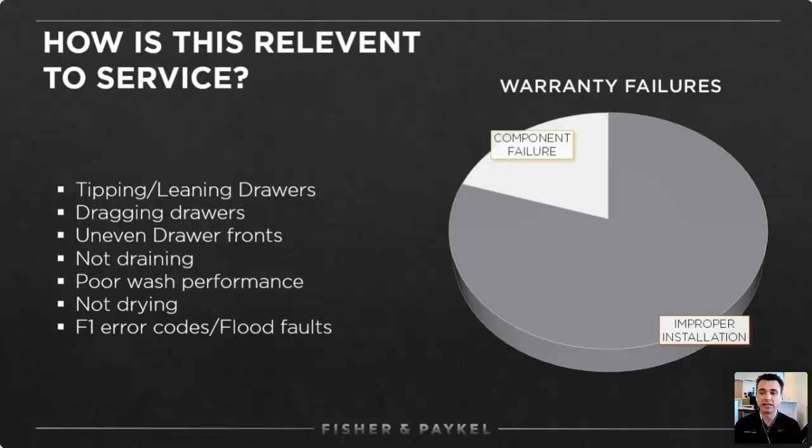There's a variety of symptoms to look for when you suspect improper installation, including drawers that tip or lean out of the enclosure when they're opened, drawers that do not line up with one another, poor wash performance, poor drying, poor draining, flood faults, just to name a few.

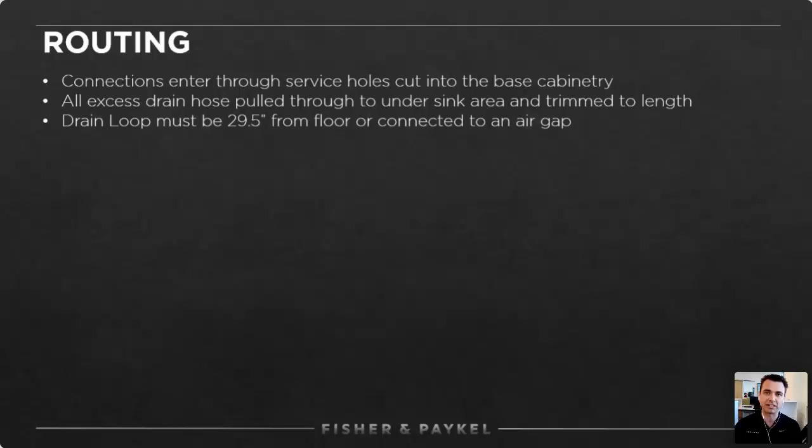The first topic that we want to cover when it comes to the installation and things to watch for when you're called out on a service call for these products is the routing of the drain hoses. This is a very critical part of the installation, and it is almost never done correctly. The hoses are meant to be routed through the service holes that are drilled into the floor of the undersink area, not into the sidewall. Having the lines routed through the cabinet floor ensures the maximum efficiency of the product and also reduces the chances of the drain hoses kinking, leading to other issues down the road.

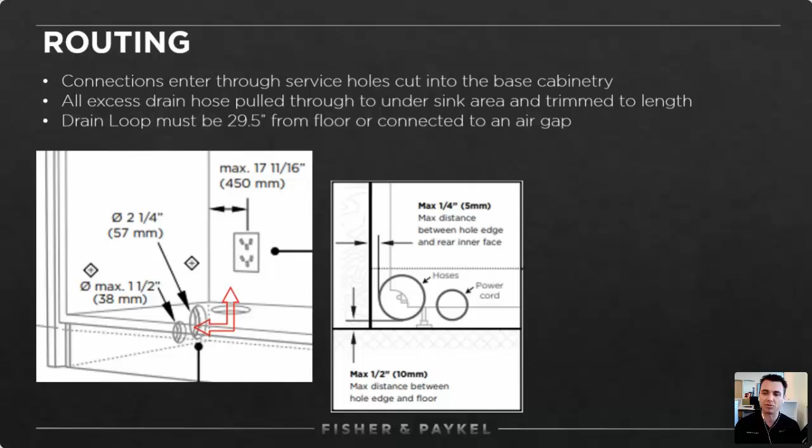All of the excess drain hose should be pulled through to the undersink area and trimmed to length as needed based on the drainage setup of the home. You'll often find most of the excess drain hose bundled up behind or underneath the machine. As we said, all of the excess hose should be pulled through to the undersink area and immediately routed as high as the undersink area allows, or at least 29.5 inches from the floor.

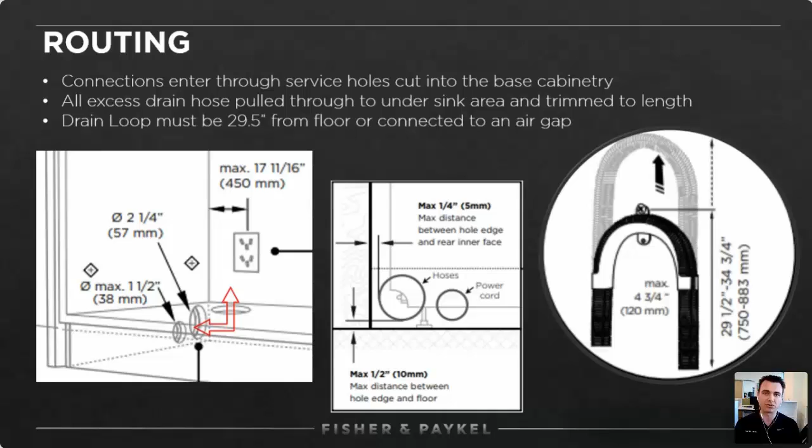If you're in a market that uses an air gap or a similar type of drainage device, then you will not need a drain loop because the air gap or similar device will take the place of that. But if you are not in a market that uses an air gap or devices like that, then you will certainly need to have the drain loop bracket mounted properly and utilized. They do come provided with the product, but oftentimes you'll find that they're mounted too low, they're incorrectly placed, or sometimes they're not even used at all. All these factors can lead to some of the issues mentioned earlier: poor washing, poor drying, poor draining, even flood faults.

There's a few different styles of drain connections that we encounter in the field. The most common that we see basically fall into three categories. If you are in an area that does use air gaps or other devices like that, we do recommend a dual air gap where it has two inlets and one outlet. Obviously, each drawer has its own drain line, so we can separate the drainage, and that will absolutely stop the chance of backwashing from one drawer to another.

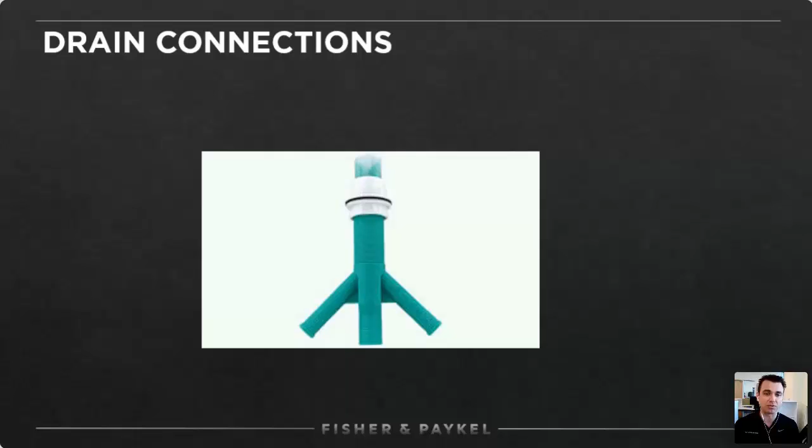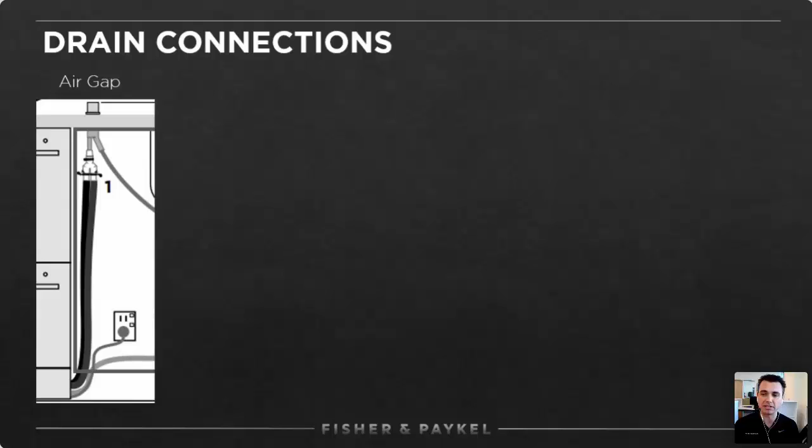But as we can see here, a single air gap works just as well when the drain hoses are routed properly with the provided yoke. The other type of drain that we'll see, much less common nowadays, is the standpipe. And again, we can see that our drain loop bracket is mounted properly.

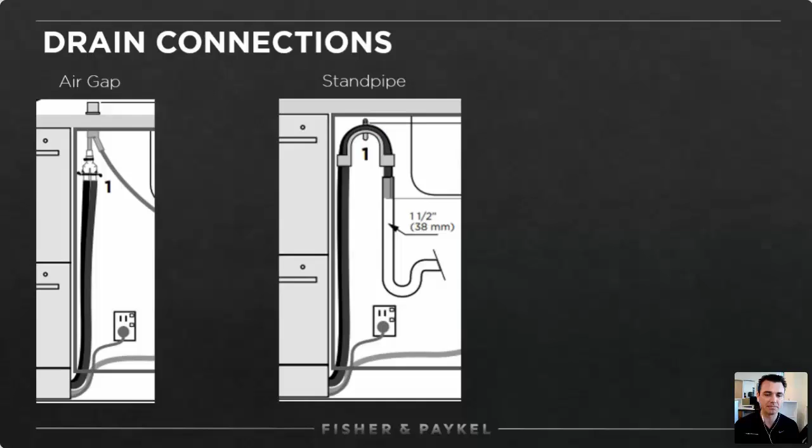And then the most common is our garbage disposal, the traditional setup. Any one of these installations is sufficient, but the most important factor is to make sure that all of our excess drain hose has been pulled through to the undersink area and is routed nice and high and is trimmed to length, depending on the installation. So we really don't want any sag here after the high loop.

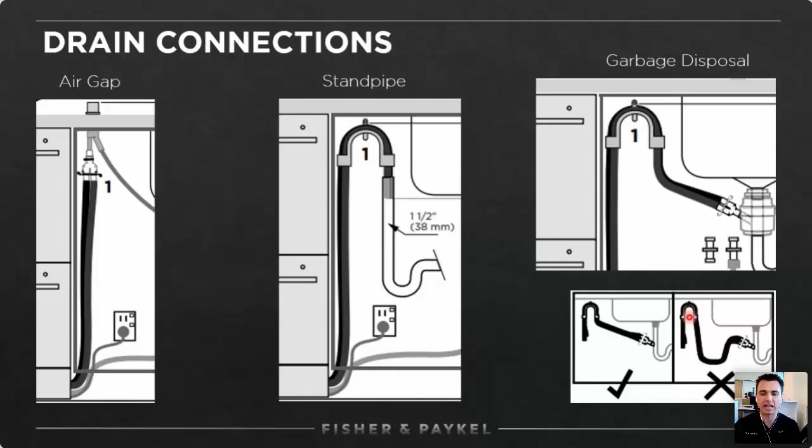So a few real world examples. What you'll often see when you're called out on a Fisher & Paykel dish drawer is, like we said, installation that is not done correctly. So a few things to point out. We can see the drain loop bracket is in use, which is good, but it's a bit too low. It should be mounted quite a bit higher. And we also have a lot of excess drain hose here.

So this would be a simple service call to correct. If the customer was encountering incomplete draining, improper drying, poor wash performance, backwashing from one drawer to another, then this more than likely is the culprit and is an easy fix for a service technician. We can just relocate the mounting bracket.

Depending on the depth of the cabinet, we can check to make sure that all the excess hose has been pulled through. And if it is safe to pull it through the sidewall, then you can do so as long as there's no risk of kinking or twisting the lines. Then we can reinstall the mounting bracket to the proper height and trim the length of hoses as needed.

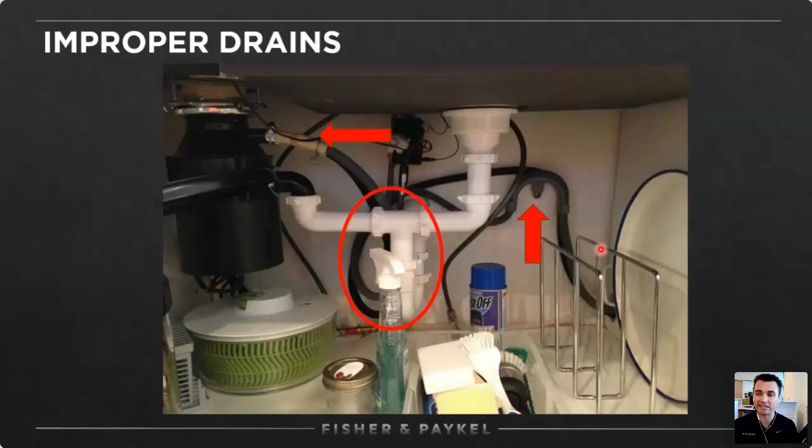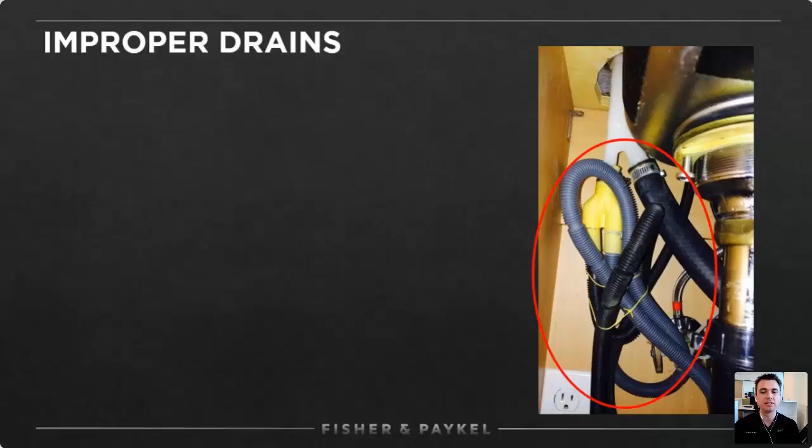Another example of what you may encounter is a traditional single air gap here, but it looks like they do have all the excess pulled into the undersink area, but it's just bundled instead of being trimmed to length. Again, this would be an easy correction, as we could just squeeze the little wire clamps on the yoke, back the hoses out, measure, trim to length, and reseat our connections properly.

And our final example of an improper drain. We can see here, obviously, a lot of excess hose. Our high loop bracket has been installed, but it is just not mounted. And then we also have a very dangerous connection here in the base of the cabinetry. This example here was actually exchanged 3 times for not draining.

And luckily, this was installed on an island with a false back, so it would make correcting the issue much easier. We could just remove the false panel, pull the lines through, mount our bracket properly, and make this connection under the sink where it should be.

So the next topic we want to cover is leveling. Dish drawers are designed to be completely level, front to back and side to side. Improper leveling can be a contributing factor in some of the most common service calls for the dish drawer, including excessive noise, uneven drawer panels, poor wash performance, and the tipping, leaning, or dragging of the drawers.

As a technician, you want to check for level after removing the bottom drawer, across the chassis and here on the rails themselves. So this is easily accessible when the bottom drawer is removed, and correcting the leveling is as easy as adjusting the 4 leveling feet. If you have a small ratcheting 5mm bit holder or just a traditional 5mm open-ended wrench, it can make correcting the level on a dish drawer much easier. However, you will need to remove the mounting hardware first.

And so when it comes to mounting, there are two different methods to fix the dish drawer to the surrounding cabinetry. You can mount through the cabinet face using these supplied mounting brackets, or you can mount through the chassis itself. We'll first cover the cabinet face mounting with these brackets, and here we can see that the mounting brackets are locked into the chassis across these straps, and it is meant to have the tail ends extend and thread through these slots, not enter the chassis.

So these brackets here still have about 1/4 of an inch to go before they are fully seated and fully locked in place. But if this is the method that the installer has chosen to mount the product, all 4 need to be used. There's 2 on each side, as well as 2 additional mounting areas on the top of the cabinet chassis itself. And we do also recommend using that as well.

So drilling pilot holes is something that we do recommend, because if you are mounting to the cabinet face, there's a chance that the cabinet can split or fracture. Again, that's more on the installation side of things, but something to watch for in the field if you're called out on a tipping or leaning product that isn't mounted securely.

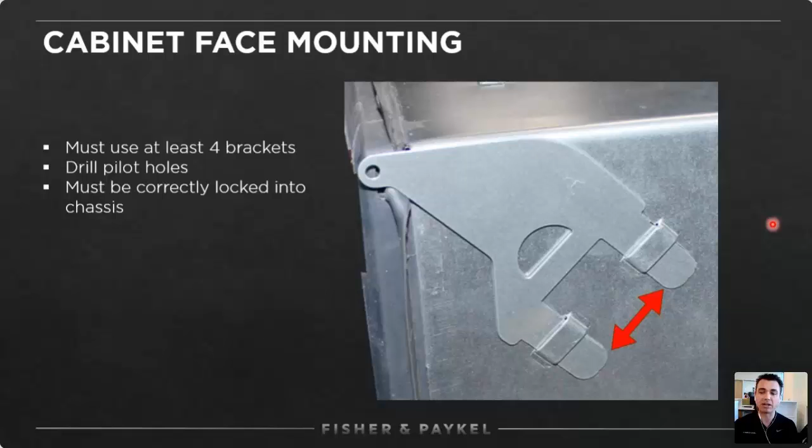When it comes to service, there is a much better method to mount the product or to correct it in service situations, and that is mounting through the chassis. So mounting through the chassis is by far the best way to mount the product securely and semi-permanently to the surrounding cabinetry. So as we can see, the chassis of the dish drawer has mounting brackets that are actually cut into the frame. And there's 4 of these brackets on a double unit, 2 on each side.

Of course, as you can imagine, if the cabinetry that you're sliding into is hollow, then you may not be able to use this, but most installations can utilize these mounting brackets, and this is by far a much better way to secure the product to the cabinetry. So luckily, on the service side of things, if you are called out and you do determine that you need to secure the product to the cabinetry, this is by far the best way to do it.

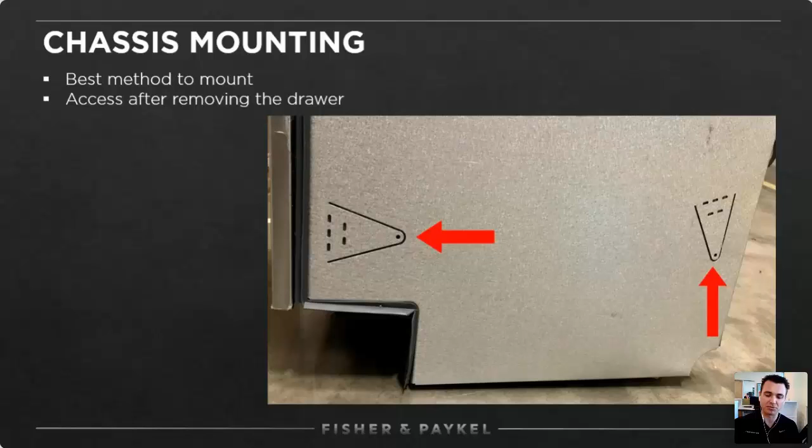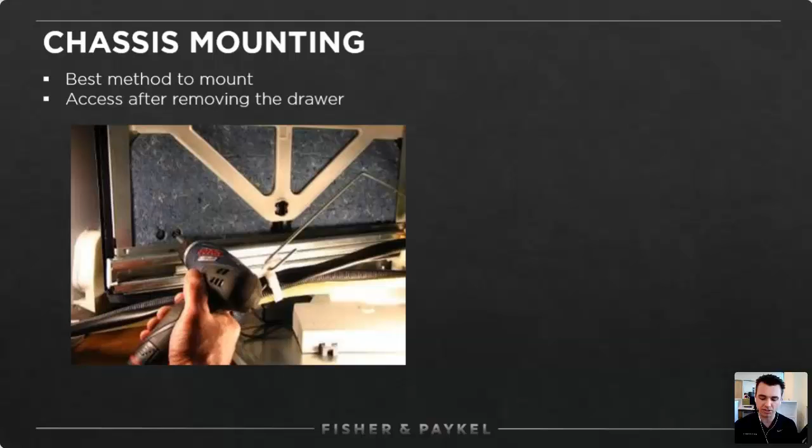Again, simply remove the bottom drawer, and that'll provide you access to the inside of the chassis, and you can drive some screws through the chassis in those brackets to the surrounding cabinetry. And we can see that there are some reliefs in the insulation to mark where those mounting brackets are going to be.

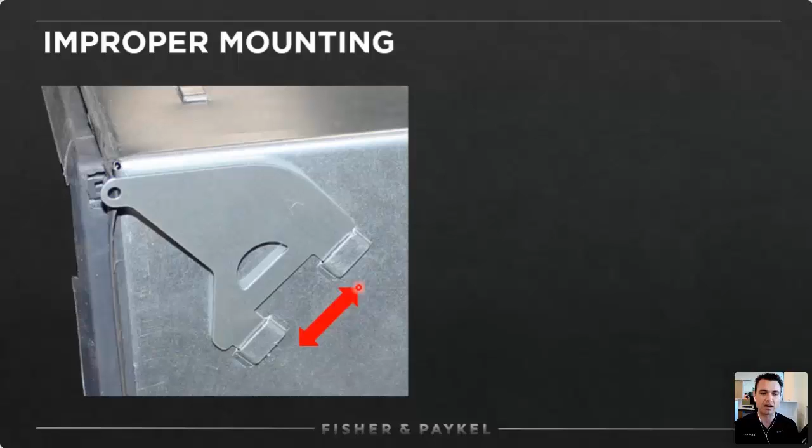So some examples of what to watch for in the field when it's concerning mounting. So if you're called out on a brand new dish drawer for an F1 or a flood error, the most common cause that we have seen is mounting brackets that have not been installed properly. The tail ends of these brackets we can see have gone into the chassis. And what this does is it actually interferes with the raising and lowering of the lid yoke. And if that takes place, the lid will no longer seal against the tub, and you will have some definite leaking and the inherent F1 error code.

So this can all be corrected very simply by either uninstalling these brackets and mounting them properly to where the tail ends are threading through the straps, or you can disengage these brackets entirely and mount through the chassis and frame, as we had seen earlier.

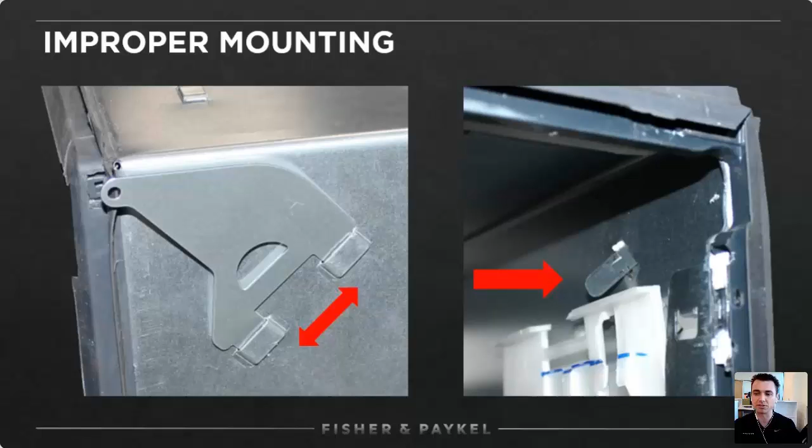So the next thing we will discuss is a little feature of our integrated dish drawers. So integrated dish drawers fit seamlessly into any kitchen. And because of this featureless design, the interface is actually part of the inner tub flange. So where the customer is going to select their cycles, their wash modifiers, and things like that, and actually start the machine is all done from the inner tub flange. So with that in mind, there's no way to stop or interrupt the cycle without a button on the front. In the past, Fisher & Paykel has used a variety of methods to interrupt the cycle, but currently we are using a knock to pause sensor.

So this knock to pause sensor is meant to be mounted to the back side of the decorative door panel. So this little accelerometer comes connected to the wash controller from the factory, but it does need to be rigidly mounted to that decorative door panel while using the included panel bracket as a guide. We can see that the three mounting bosses of the sensor correspond to the three holes drilled within the panel bracket. Oftentimes, these sensors are left dangling on the front of the tub, are only held on with one screw or the supplied tape, or are not oriented properly.

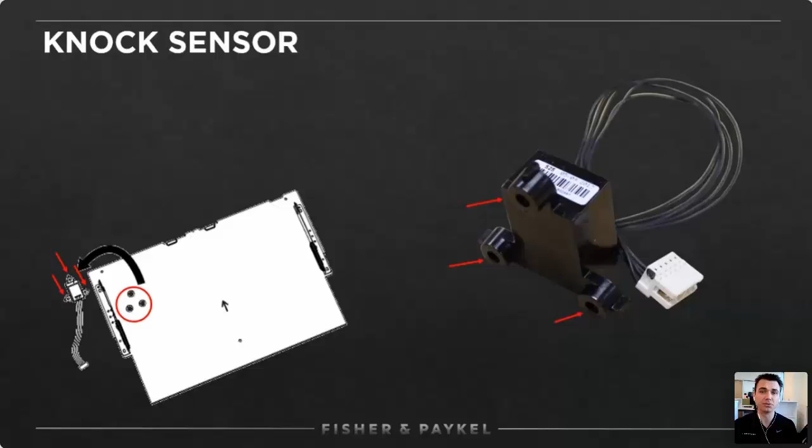So with a drawer-style dishwasher, you can imagine the complexity of venting all of the moisture-laden air to the atmosphere after the cycle is complete. So the Fisher & Paykel DishDrawer vents in a very unique way. On double drawer models, the upper tub vents in the gap between the upper and lower drawers, and the lower drawer vents into the toe kick area.

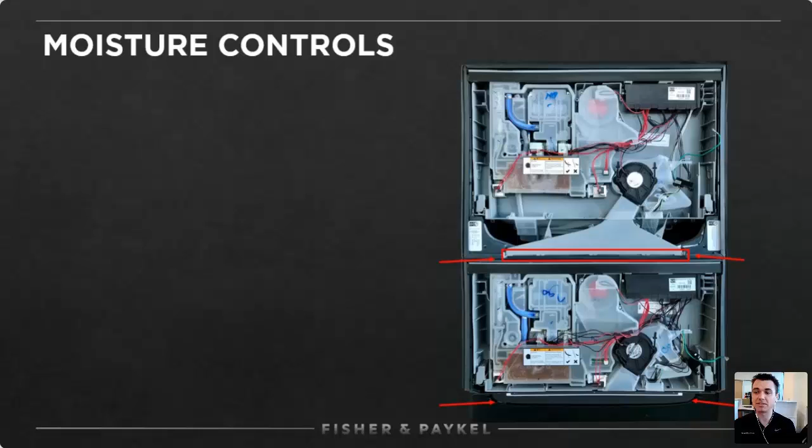Integrated models utilize similar venting, with the exception of the single integrated model. That unit has a remote vent system. So on single integrated models, this additional tube and box should be attached to the rear of the chassis, and the box itself should be located in an adjacent cabinet, whether that's below the dish drawer or to the side.

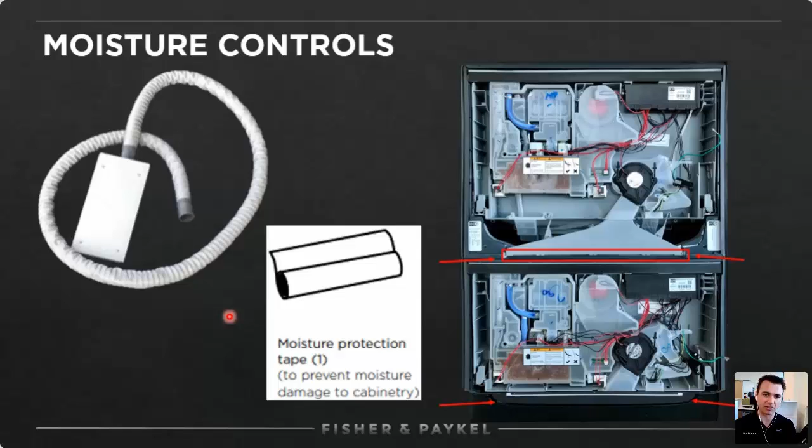But regardless of the model, all dish drawers should have moisture protection tape applied to the inner cabinet surfaces before sliding the product into place. It's also required that integrated custom panels be moisture proofed. There's a variety of ways to achieve this, but that is ultimately up to the installer and the cabinet maker. I wanted to make mention of this because if you are attending a service call due to moisture buildup or damage, please take a look at the installation, especially these features, as more than likely something was missed.

So we'll now discuss a few service procedures that you may find helpful while in the field. A number of times throughout this presentation, I had mentioned accessing behind or beneath the drawers. And the following video is going to show how to disengage the tub from the rails to access those areas within the chassis.

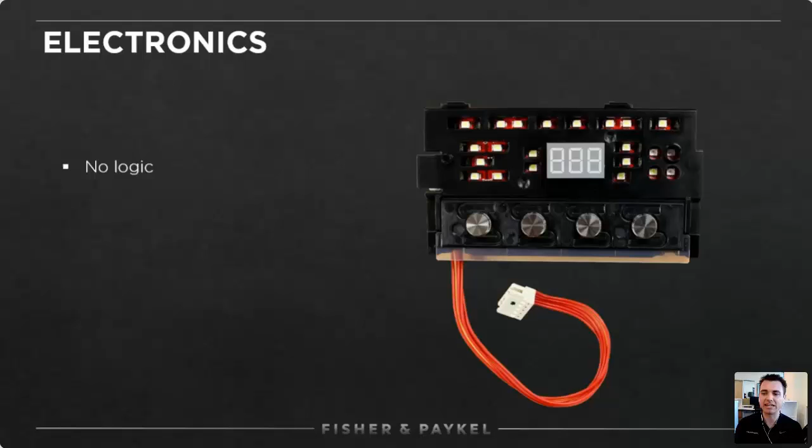So to more accurately diagnose these products in the field, we need a clearer understanding of the electronic systems. So the first electronic component in our dish drawer is the display module. This module does not contain any logic, and it does not activate any components. It is responsible for acting as an interface between the machine and the customer, allowing them to select their wash cycles, the wash modifiers, and any other options such as delay start.

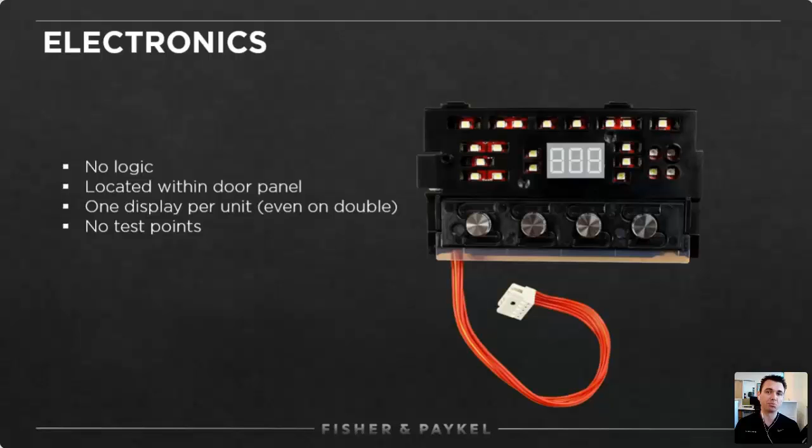So the display module is located within the upper door panel. There's only one display module per unit, even on a double, and there are no test points for this module, other than checking for your incoming power supply from the wash controller. So this component can be tested in the diagnostic mode, as we've seen in the previous video. So the only way to test this is for power and to check if the LEDs are operating properly. But again, there's no logic within it, and it does not activate any components.

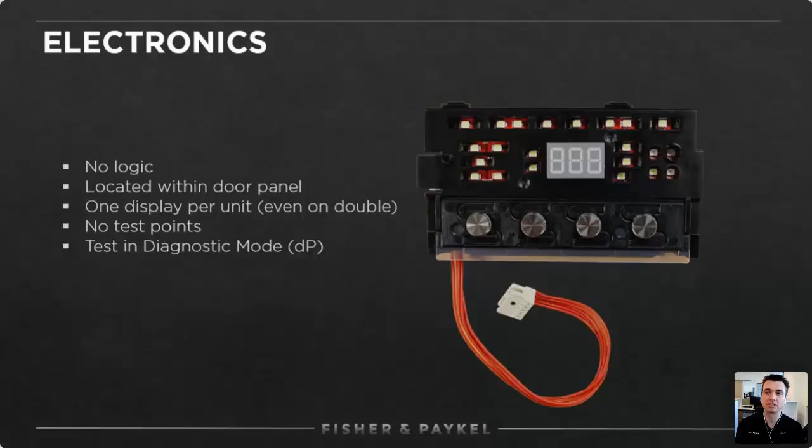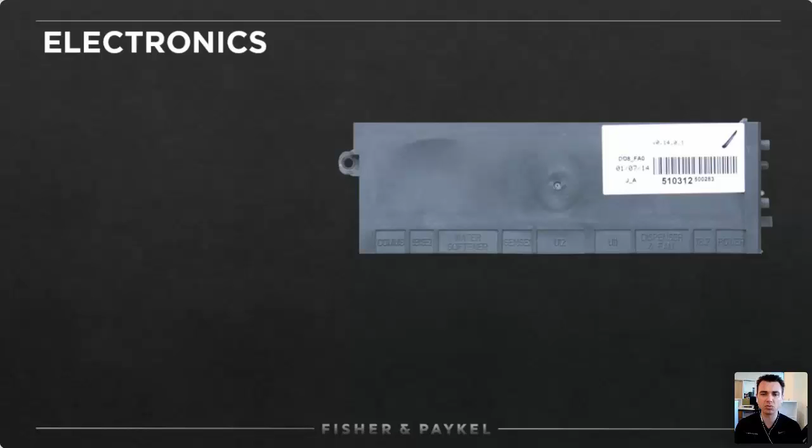The next two electronic components are a little more complex: the wash controller and the motor controller. So you'll find one wash controller per tub mounted to the front of the tub behind the door panel. So this wash controller contains all of the logic and decision making for the machine. You can think about this as the brains of the operation. So it directly powers the optics, the temperature sensor, the display module, the dispenser, the drying fan, and the water softener if your model is equipped with one.

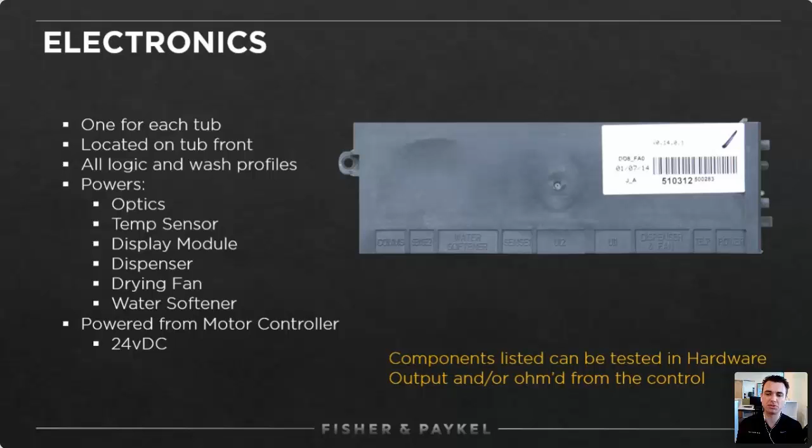So it's powered by 24 volts DC from the motor controller, and all of the components listed above can be checked with your meter from the harness connections at the wash controller or through the hardware output test mode that we saw in the diagnostic menu.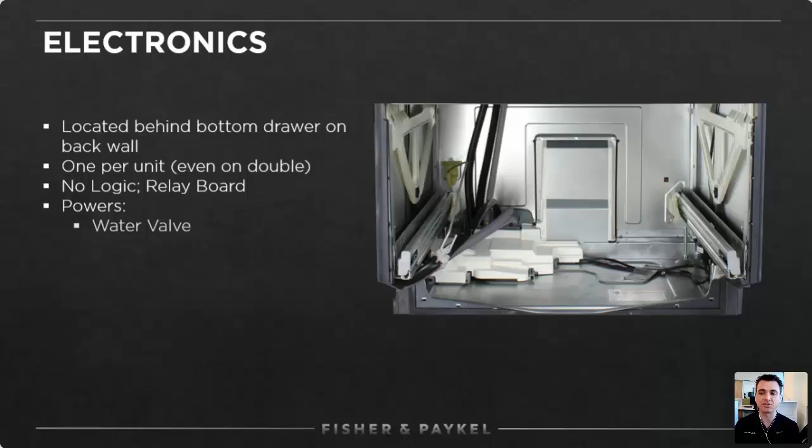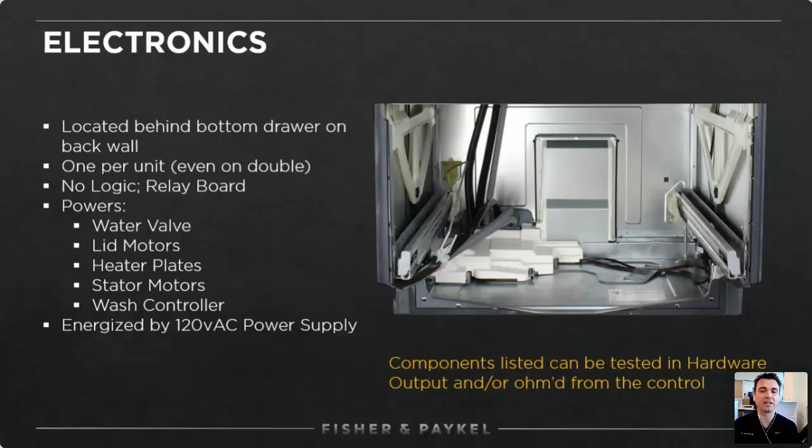So the motor controller directly powers the higher voltage components, such as the water valve, the lid motors, the heater plate, the stator motors, and the wash controller itself. It's powered directly from the supply voltage, the 120 AC from the terminal block. And again, all of the components listed above can be tested with your meter at the motor controller harness connections or through the hardware output test mode within the diagnostic menu.